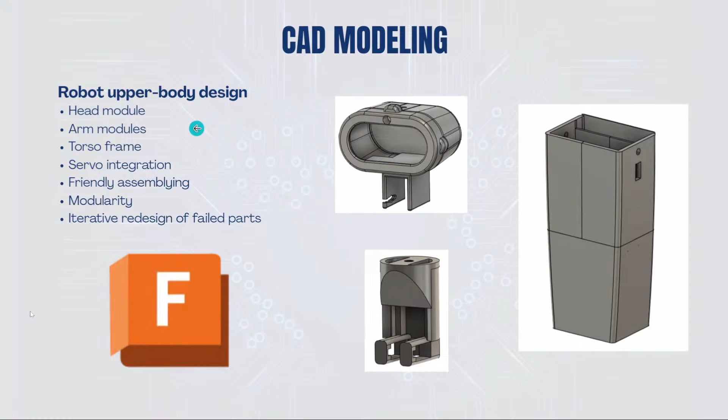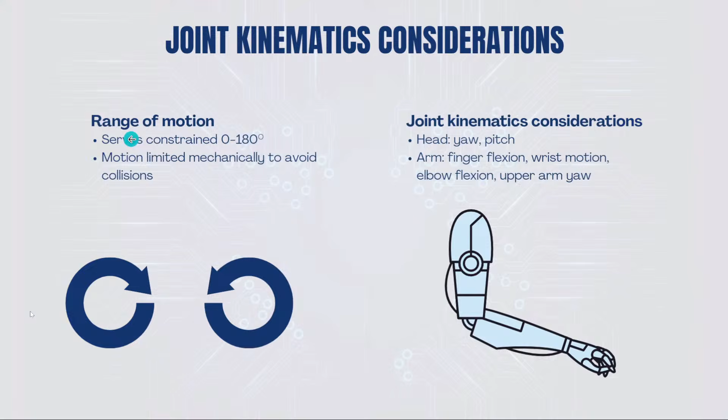Here we have the joint kinematics considerations, and the range of motion of each servo was limited mechanically to avoid collisions, and also some joint kinematics considerations, which are the movements of the head and the arm. And here we have a video of how the printing process works. In this case, it is the printing of one hand of the robot.

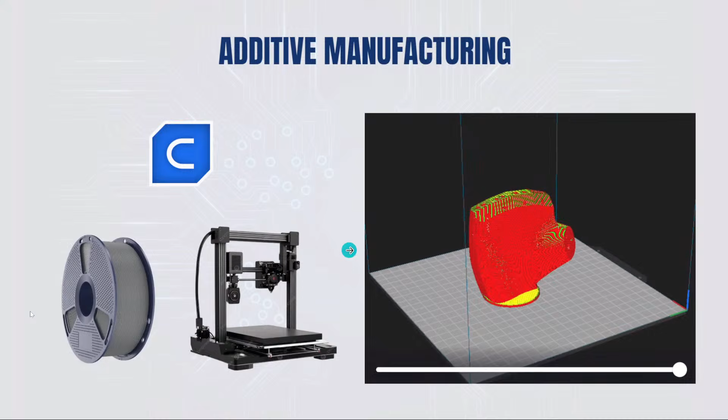Okay, and then we continue with the technical specifications. First, we have the actuation system. This system consists of the servo motors. Here we have a smaller one. This was planned to work for the fingers. So this needs to be lightweight and also compact, so it can be easily mounted in the robot. And its purpose is the finger flexion and extension.

Now for the wrist, we have a higher torque servo, which is an MG996. For this joint, we need more torque. So this also means that this servo is bigger.

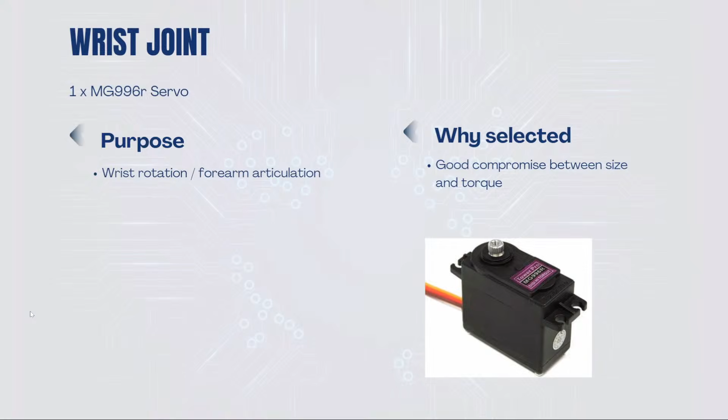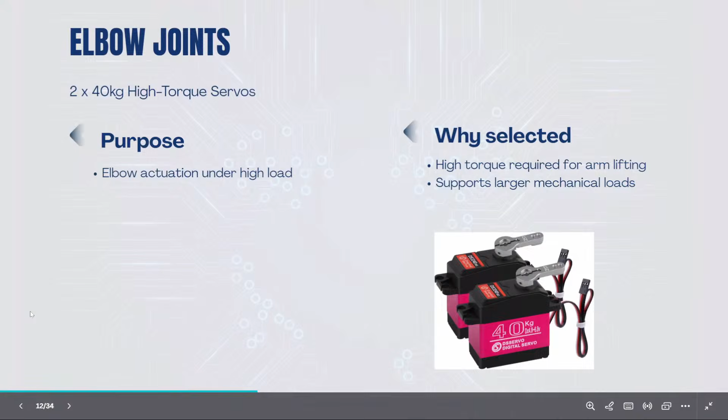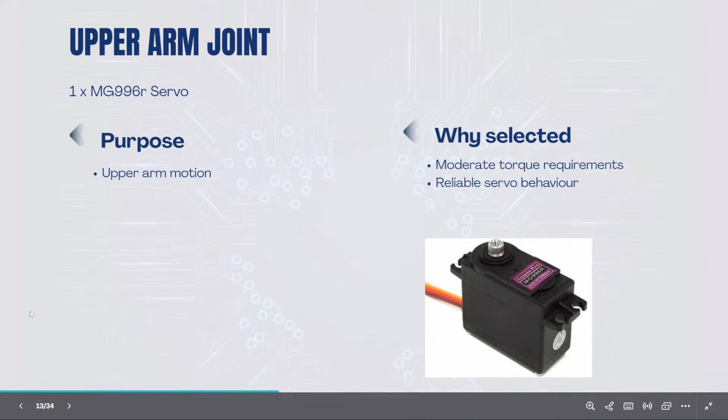And then for the elbow joints, I also use high torque servos, but in this case it's 40 kilograms because it needs to support larger mechanical loads. Then for the upper arm joint, we also have a MG996 servo because it doesn't need that much torque. So that's why I use this.

And for the head mechanism, which is composed of 2 degrees of freedom, we have these two servos for the movements from right to left and up and down.

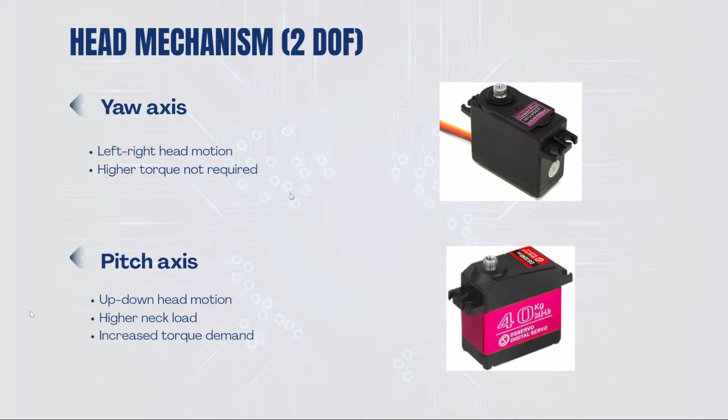Okay, now we have the power system. And in this case, I use a LiPo 2S battery because this can deliver a high peak current, and it also brings a suitable voltage for mixed servo types. And it's also stable under multi-servo load.

Okay, then let's continue with electronics and control. For the electronic components, the most important ones are the power distribution bus and the voltage regulator, because the servos will be working at a different voltage than the one supplied by the LiPo 2S battery. So I need to regulate the voltage. And of course, we have the microcontrollers.

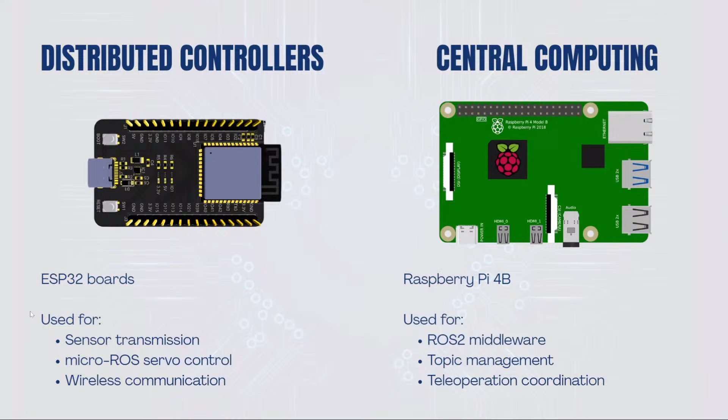In this case, I use ESP32 boards, which were used for the sensor transmission, micro-ROS servo control, and wireless communication. And the central computing, which is a Raspberry Pi, used for ROS2 middleware, topic management, and teleoperation coordination.

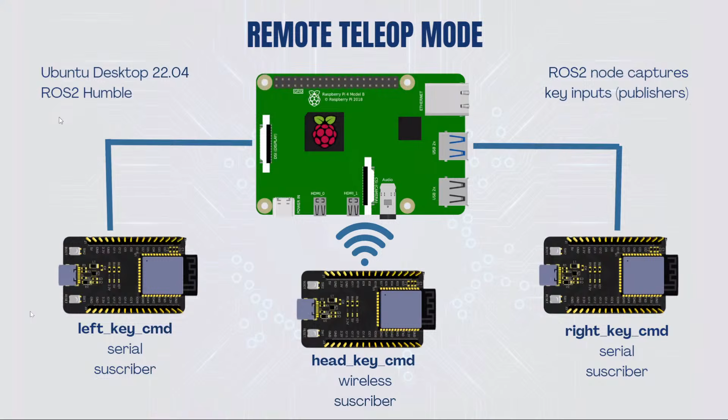Okay, we have some considerations for the remote teleoperation mode. It is very important to use Docker in this project because for registering my robot to The Construct platform, I use Docker. And in that way, I can use the ROSject to control the robot with SSH. So in that case, I can enter the terminals and run all the programs to start working.

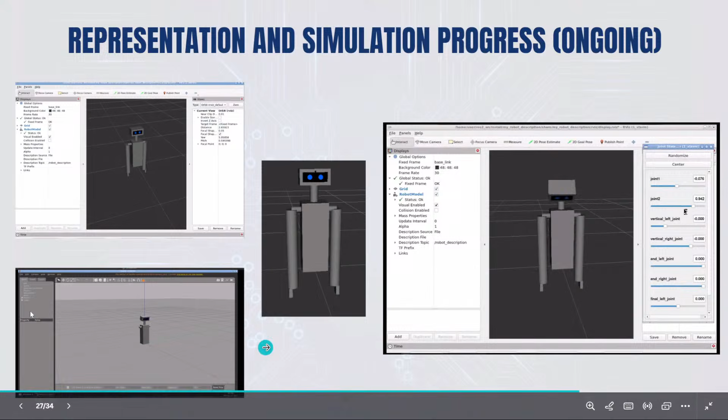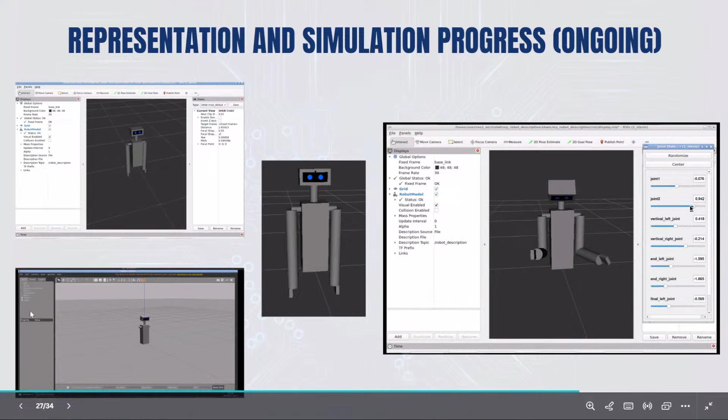And this is a representation and simulation of the robot. This is ongoing because I faced several challenges. For example, here we can see RViz, and I can move the joints in RViz with different values. And Gazebo is in the window below, because it is not finished. Because sometimes when I try to make the simulation work, the arms have some problems and don't appear in the Gazebo simulation. So that's why this is ongoing.

And then we continue with the object detection system using YOLO. And as I mentioned before, this system will generate some images with bounding boxes and labels. So the robot can identify different objects in real time. For example, it can detect a person, a chair, a plant, many objects.

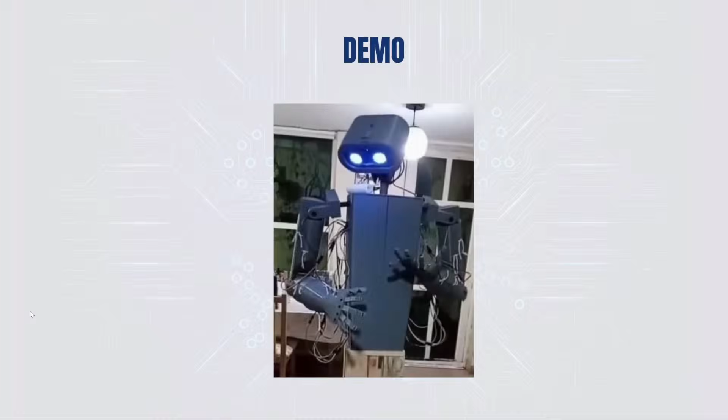And also we have a web interface. This uses HTML, JavaScript, and roslib. And the communication between the web page and ROS 2 is achieved through rosbridge, which provides a WebSocket. So this allows the connection between the browser and the ROS 2 ecosystem. And here we have another video of the robot working, moving the arms and the head.

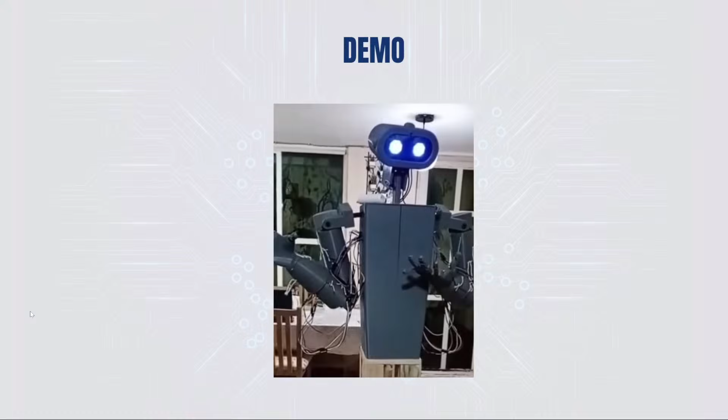Okay, so the results of this project. We have a web page visualization, real-time control with a keyboard, ROS 2-ESP32 communication with micro-ROS, wireless communication, object recognition using YOLO, 3D design and printing, and smooth actuation of head and upper limbs.

And for future work, I'm planning to do vision-based autonomous manipulation, predefined gestures, stronger materials for the robot, like nylon, and the full dynamic simulation with Gazebo and RViz completed, working completely. So to achieve this, it's also important to use servo motors with encoders.

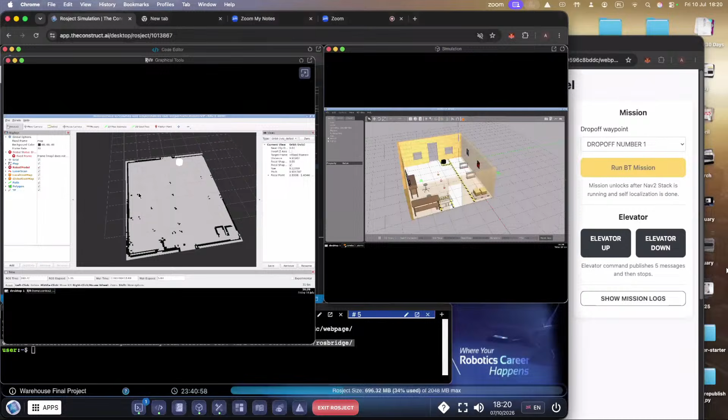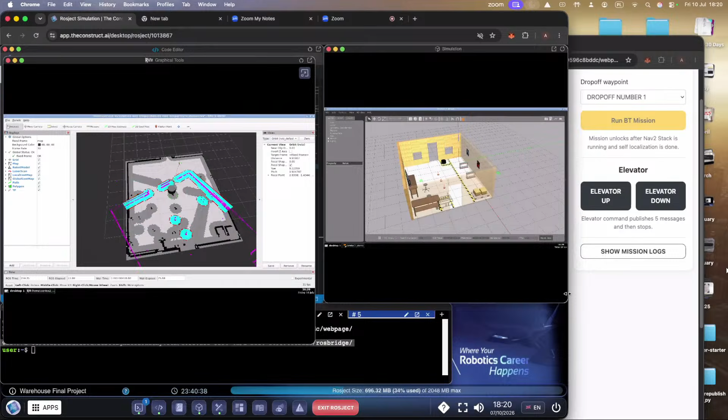So we start the nav2 stack, and in a few seconds we should see the robot in RViz. The robot doesn't know where it is right now, so let's make it harder. We start the self-localization, which resets every parameter and makes the robot rotate and look around to see where it is. That worked, because the robot is indeed in this place.

Let's see if our joystick works. Each side of the interface has its own logs, but we can hide all of them for now. Yeah, as we can see, the robot is moving. The joystick is working, right?

And now the screen is way too small. So now we can start our mission. Here we have some basic information about where the robot is, what's the angular and linear speed, basic stuff.

So I will ask our audience, and Alberto, you can tell me where the robot should go. Should it go drop off the shelf at drop off number 1 or number 2? Okay, so whoever wants, you can decide. Whoever wants 1, type 1 in the chat. Whoever wants 2, type 2, and the one with more votes will go for that one. We'll make this entertaining.

I'm going to vote for example, 1. There is a little bit of delay between us talking and YouTube live, so maybe it's going to take some seconds for them to respond. Or we can just say it's 1. Okay, we are starting to receive votes now. For now it's winning number 1. So let's go for 1.

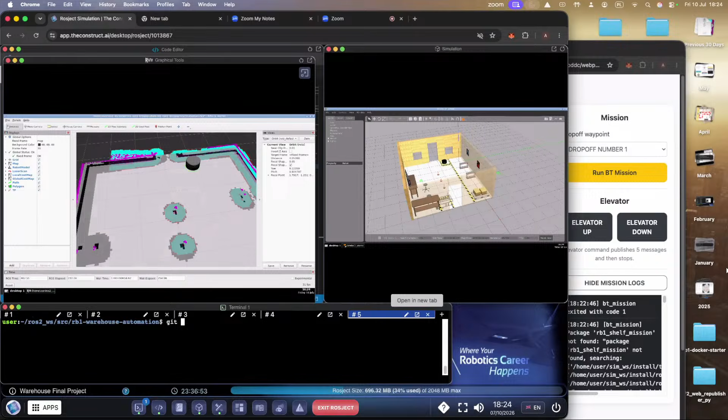So okay, let's do it one more time. Sorry for this. What I did was I checked the simulation, and then, because I wanted a clean source, I deleted everything and recompiled, and this time I couldn't recompile all the way to the end.

So it's always interesting to see all these things live. But basically, this is what we do. This is programming live.

And the good thing is being able to detect it quickly. So this is what's happening. We need to compile it again, but now with the bigger computer it should be pretty fast.

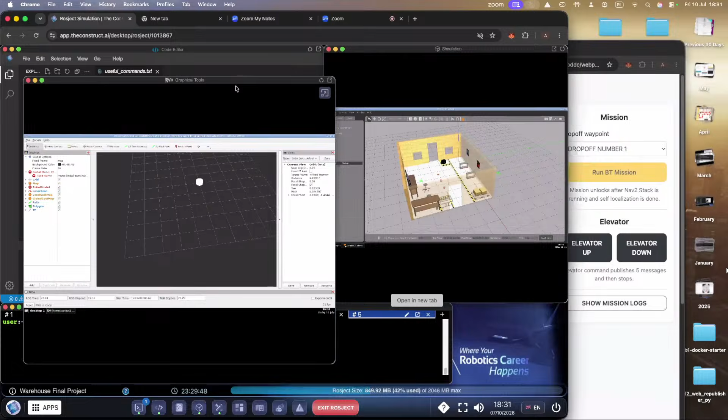Did we do it? Okay, the simulation works, it's not frozen.

Okay, yeah, this looks correct so far. We were not seeing the map earlier, so maybe that was it. I would try again. Just try again. Okay, there, now we go, it's working.

Okay, and now a bit of trivia. The reason why the robot spins only 180 degrees, and I demonstrate that the joystick is indeed working, is because in simulation this warehouse doesn't have a lot of distinction points, and sometimes, very rarely, the robot thinks it's across from this point, and when it moves around, it understands it's not actually there, but I didn't want to waste your time with it.

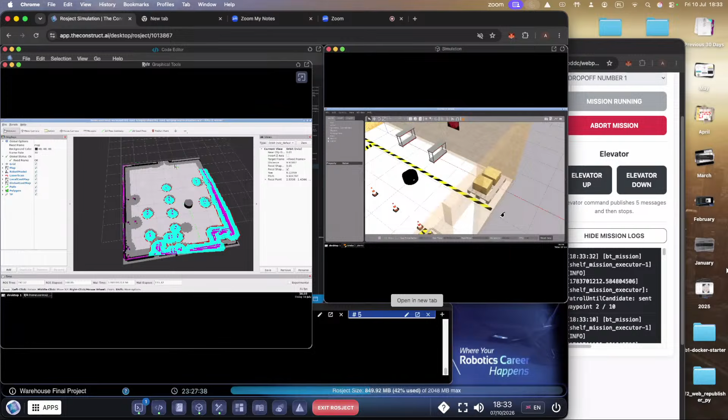So yeah, let's do it again and see if now it will work, because exit on finish is my parameter, and we trigger the mission. So the robot is going, he's patrolling, so he's going to the first waypoint, which is somewhere in the middle. I can move around in the simulation, but sometimes it can freeze, so I will try to do it so we see everything and don't make it freeze.

So custom drive on heading, he's computing the pre-dock pose. Right now he doesn't see the... this is actually good that it happened, because NAV2, as you can see, the front of the robot is not exactly facing the shelf, so it cannot confirm that this is actually a shelf. So he will come back to patrolling again, and that's actually good because you can see how this behavior works, what the recovery behaviors are, etc.

So now we are computing the pre-dock pose. In simulation, sometimes it takes some time. Okay, yeah, adjust to pose local. So now the robot will go very slowly for the final pre-dock pose, and now we start docking. During the docking, the robot is correcting its position, now this is custom docking.

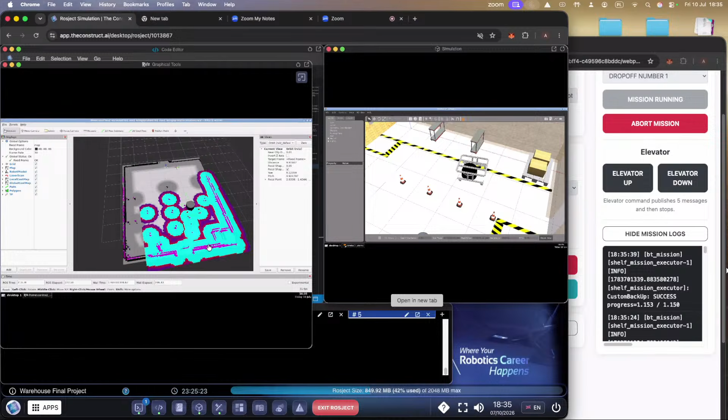As you can see, the robot is doing like an arc, because there's a wall on the left side of the robot, and you can see on the RViz map that the inflation radius around the obstacles is much bigger, because now we carry the shelf. We can confirm that the first drop off is in the middle of the first and second shelf.

So the robot is putting the shelf. And what's funny in this simulation, I will not run this simulation again, but if you run this simulation and the first thing you do is manually send the elevator up, the shelf will magically appear on the robot immediately. There's a funny bug.

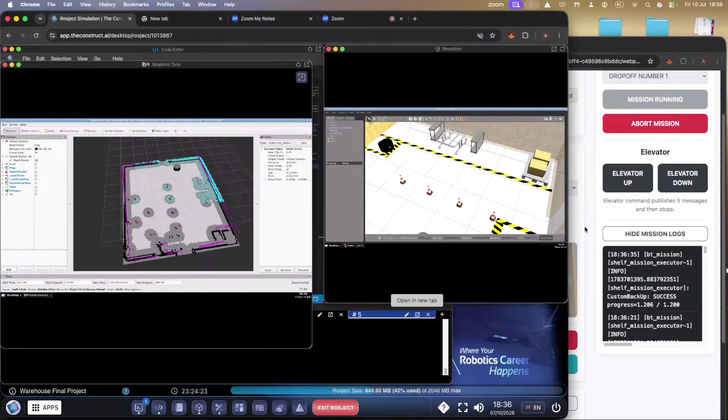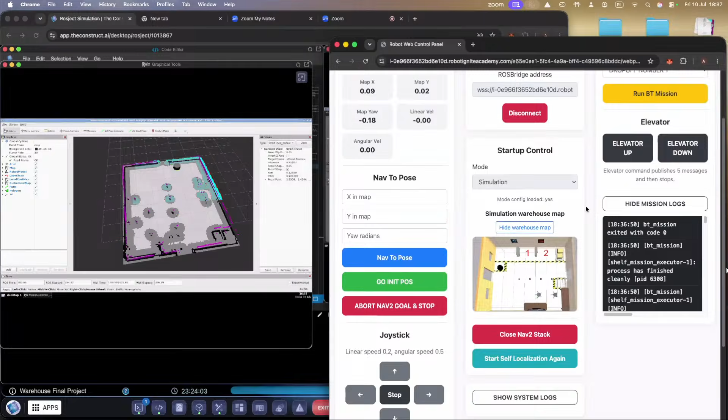And now the robot is coming back to the initial position, backing up, not going in forward, unfortunately. So yeah, as you can see, those reflective parts of the shelf are now from the other side. We cannot do the number 2 drop off right now in the simulation because the robot wouldn't find the shelf, because the moment we take the shelf up, it somehow changes the orientation.

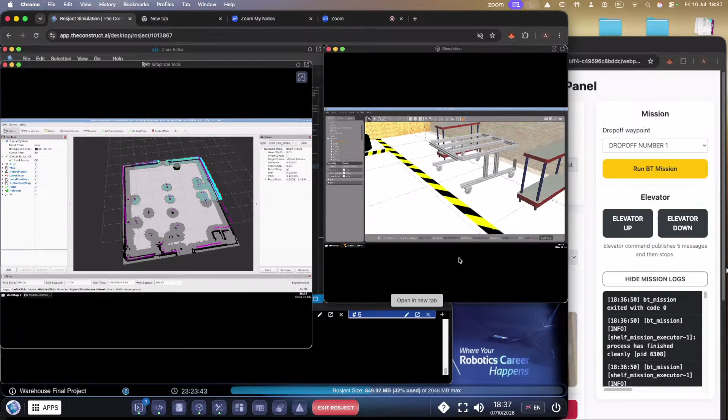So what about going to the real robot part? Let's go for it. Yeah, sure, let's go for it. Connect to my favorite robot. Book your slot. No. Oh yeah, connect.

Okay. Both cameras are working, which is very nice, because I will tell it right now, so I excuse myself in case something breaks. Sometimes when there were some network issues, this code didn't work because there was high latency, and the TF messages were not in sync. But now I see the cameras are working. The quality is good. I can see the latency. Ooh, it's 250. Okay. Let's see.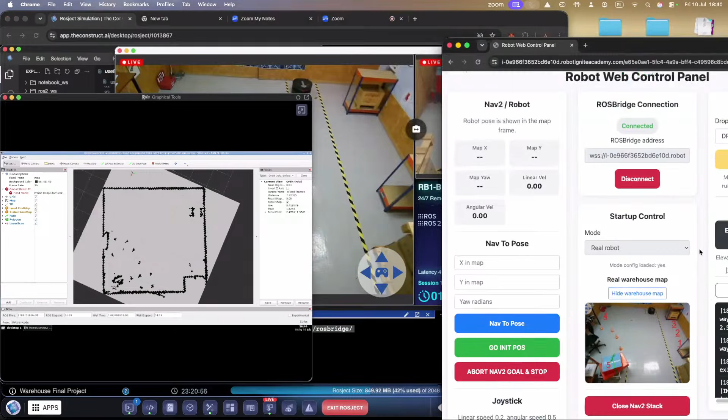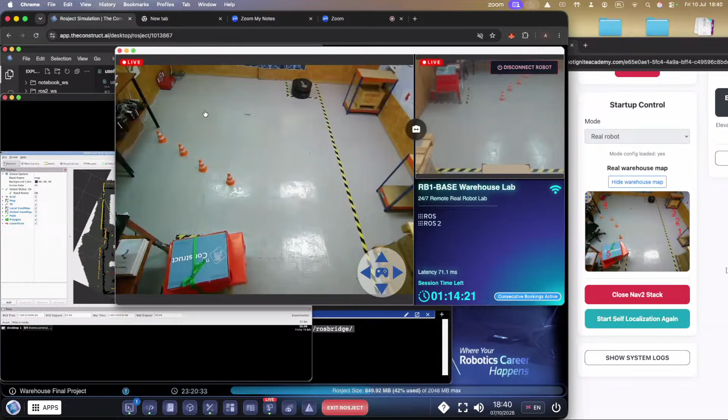Now we will start self-localization. Yeah, okay, it works. Great. At least that. So with the real warehouse, no problem. We can do a whole 360. There's a lot of distinct points. So yeah, let's do it again.

Let's ask our audience where we want to go. I will try to make it bigger. Okay, yeah, that's the absolute maximum. So the numbers 1, 2, 3, 4, and 5. Actually, 4 is next to the charger. 5 is where the shelf is by default, and 1, 2, 3, I'm just not very creative.

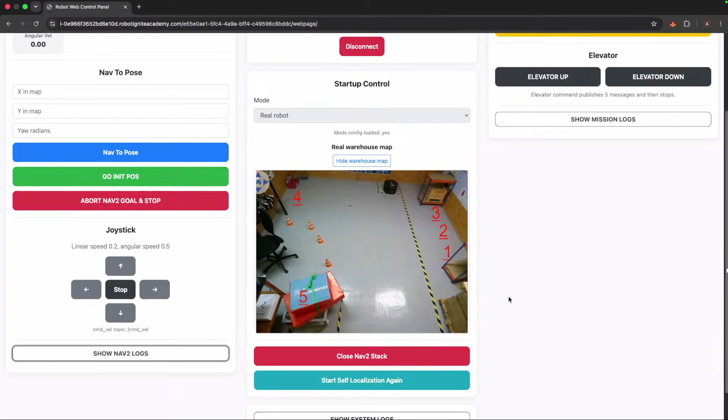Okay, so let me say 4, for example, myself. I'm going to vote 4. Let's see if we can get some votes here. Which one wins?

The shelf is properly placed? No, because it shouldn't be orange, right? Okay, so we should have the white ones? Yeah, but I can do it. Let me ask, I think Roberto is around here. Turn it around. It depends, because it's Friday, I know you guys want to have a weekend. I can do it and showcase that my joystick and everything is working. But if you can ask, it's going to be faster. Okay, yeah. This is what I thought.

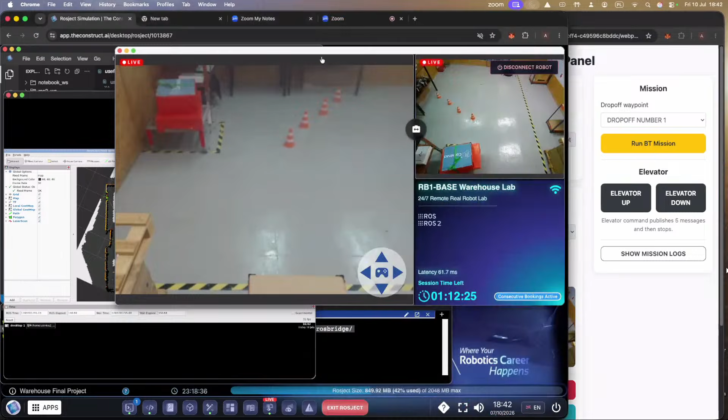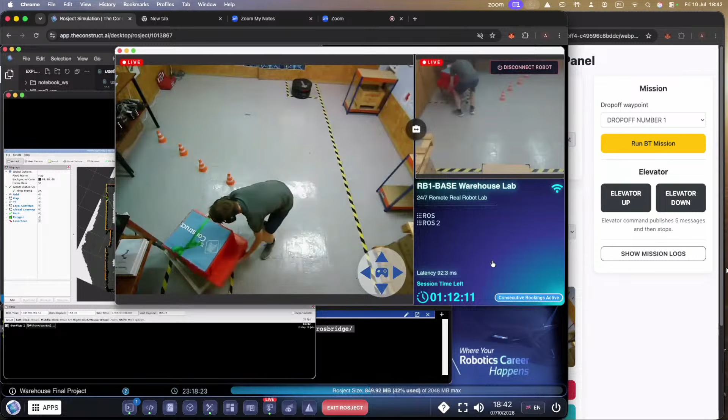Sure thing. So I think we have recently installed these new panels here also, so we have reflective panels on both sides of the shelf. On the shelf, right? Yes, on the shelf. So it's reflective, but is the intensity different or the same? It might be different. So that's why I prefer to do it with the classical ones that you've probably used for all your tests.

Yeah, I thought those oranges are just an indication that the shelf is oriented the wrong way. So we know, oh no, it's orange, we should turn it. I think they also provide intensity values, but yeah, it's better just to try like this. Alberto, do you know which? So yeah, I would say let's go with 4, because this is my favorite waypoint.

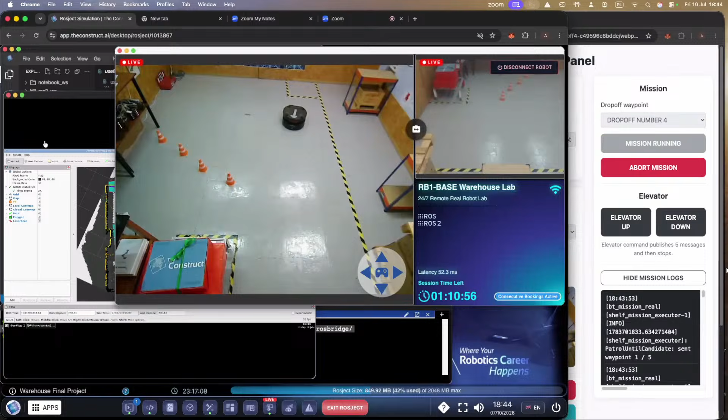Okay. So we trigger the mission. And here we have only 5 waypoints in those critical places. So the robot is moving, and now let's hope for the best. Compute pre-dock. Now we did refine the shelf geometry. We adjust the pose locally. We go under the shelf.

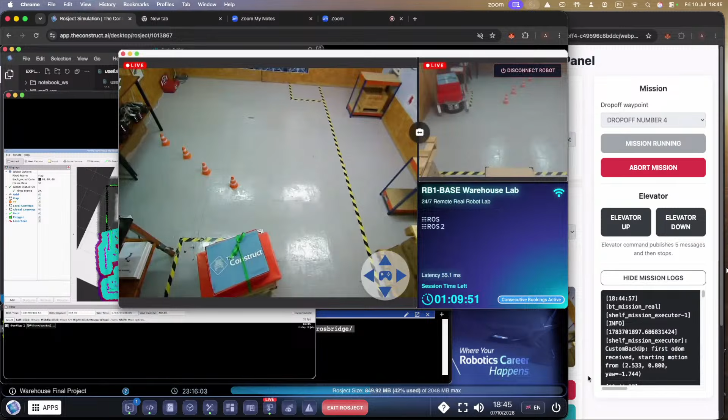Yeah, it can be seen that it's elevating. And it's moving. Like previously, he detected the wall on the left side, so he's doing the arc. Oh, this is brave. This is very brave from him that he goes. I thought he would go.

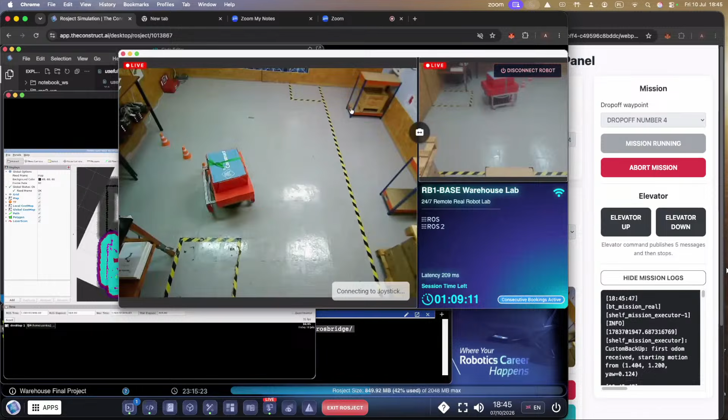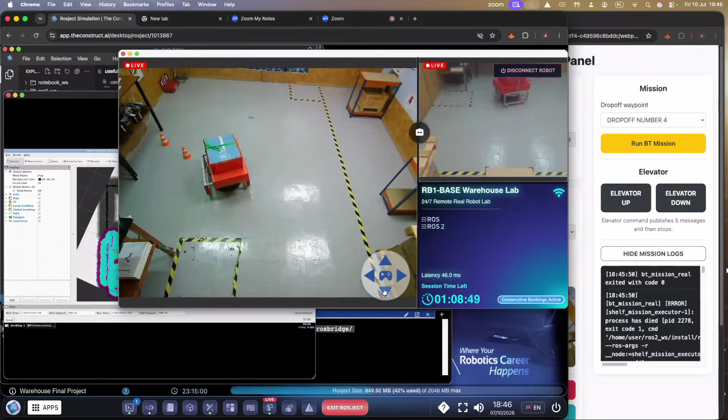Robot, why are you doing this? I think it's eating some of those cones. Yeah, he's eating the cones basically. I don't know why he thought that's enough space for him to go, not to use the back movement. So I will. Jesus.

You are celebrating it now, right? Yeah, like what? Yeah, now I'm... why? Why? Okay, I don't really understand this. Yeah, so now what we are seeing is the front of the robot from here. So, okay, I can see the red. Yeah, okay.

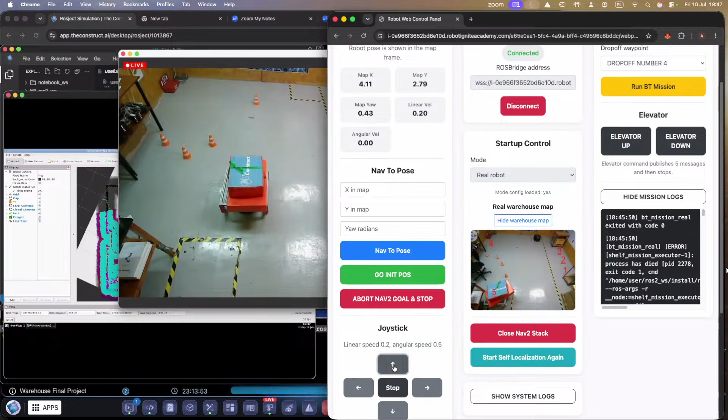Let's try again. Can you ask Roberto to put the cones in place? Because I don't want this task to be easier with the cones somewhere. Yeah, there we have it. This should be good. But now I can showcase that the buttons are working.

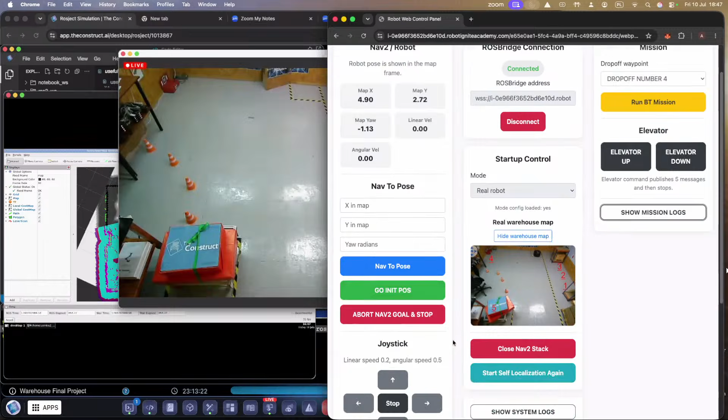So elevator down. Maybe we can even try to start the mission not from the initial position, but from the middle, between the starting point and its current point, so we don't have to go all the way back. Yeah, because the first waypoint should be somewhere here. So we run the mission.

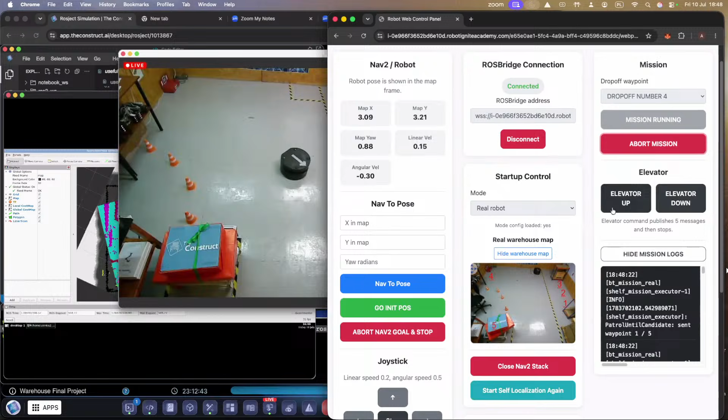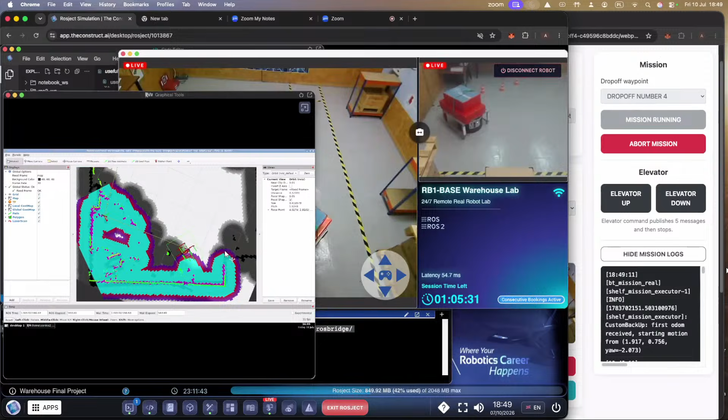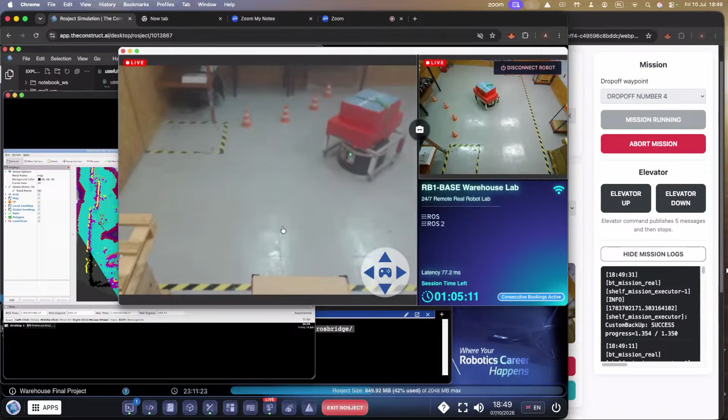So basically, what failed was I had misconfigured Nav2 somehow, going from waypoint to waypoint with the shelf. The problem is right now we have the old footprint. Okay, I'm very proud of this robot because he smashed the shelf a bit, but with the wrong footprint. As we can see, it's very badly positioned. So we should restart the whole system, because this is something I didn't do, since it was very difficult and not much to do with the robotics itself.

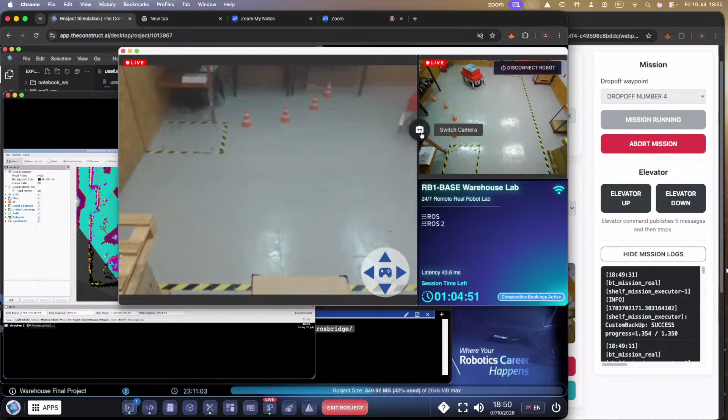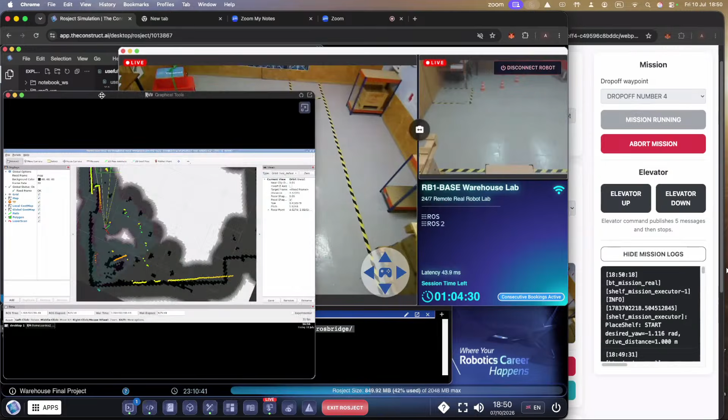I tried to create the change footprint button because during testing I had some problems with this, and I wanted a quick way to change the carry mode from carrying the shelf to carrying nothing. But I would need to hard code basically everything into the backend, and I really didn't want to do it. What I will do is stop the mission when he leaves, because he will probably smash it. Fine, okay.

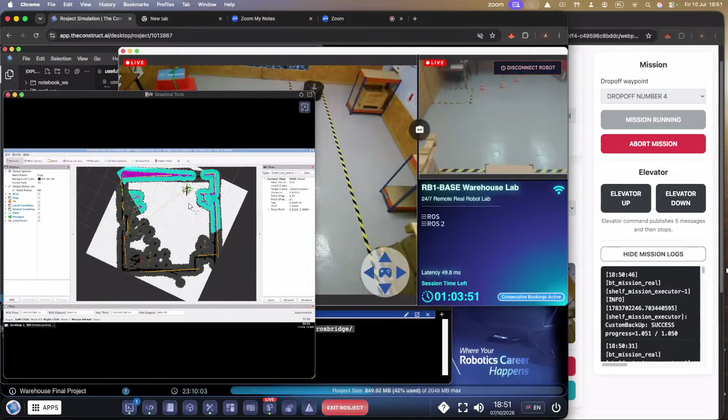So it's okay-ish. We can choose another drop off, and now it's even better because the shelf is not in a very straight position, so it will be more difficult for the robot to do it again. And now he'll change the footprint after leaving the shelf, so we can do it again. Alberto, you can choose the waypoint now, so we go faster. Is it going to be able to pick it up from there? It should. Let's go for 2.

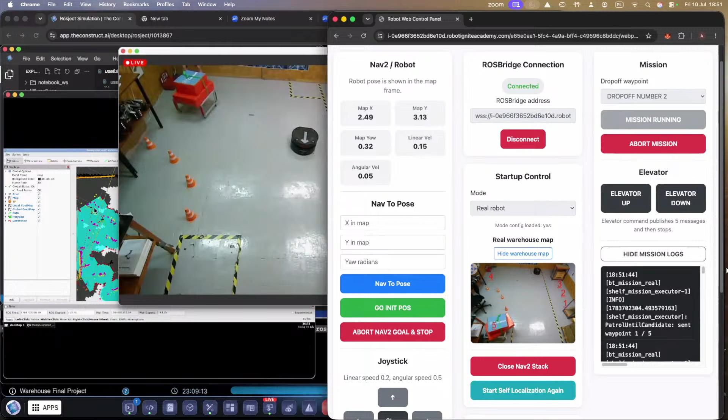And we trigger the mission. Roberto is appearing there. You don't have to do anything, Roberto. He makes it even more difficult. He's trying to put it there. Okay, very helpful, Roberto, indeed. We compute the pre-dock pose.

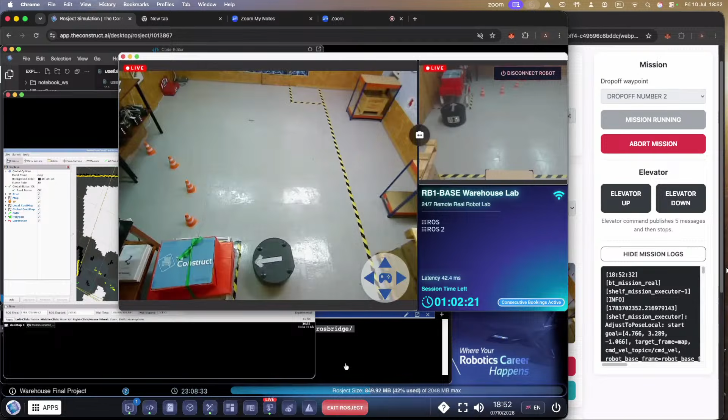So what would have happened if Roberto didn't move it? I suppose it would have continued patrolling a bit more, right? Yeah, he'd go near the charger and then to the initial point. But what would happen if Roberto took the shelf with him? The robot would do two circles, go back to its initial position, and finish the mission with success, because he just didn't find the shelf, but there were no errors, nothing interrupted the process prematurely.

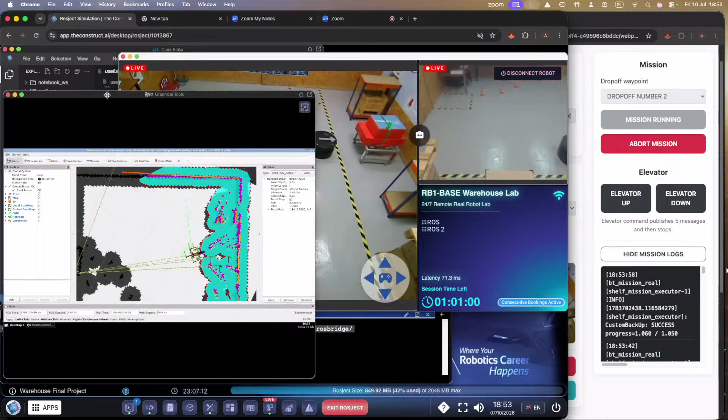Okay, now no cones ahead of us, so this one is it. That's why I like number 4 the most, because the robot needs to carry the shelf the longest distance. And the robot changed the footprint. I wanted to do it like this, so we see all of this.

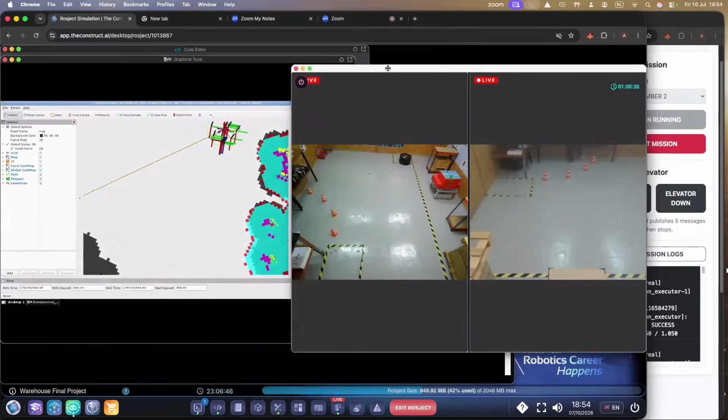Okay, Alan, so I think we can leave the real robot demo here. I think we've been able to see it do many different things. Yeah, actually, I'm really proud of the robot that it smashed 2 cones, but still was able to drop off the shelf and back without carrying it through the whole warehouse. Because this had happened during the creating of this project. So yeah.

Yeah, so it's been very interesting seeing all these different actions, tests, both in simulation and real robot. And I must say that something that's very good from your project is that you can switch seamlessly between the real robot and simulation mode. That's very convenient, right? Just by changing the button. So that is super cool and super good design for your application. So very well done there. And it has allowed us to switch between the simulation mode and the real robot very easily and do different tests and so on. So yeah, well done, Alan.

Yeah, actually creating this interface, it was not only required by this final project, but you have no idea how much it helped me during debugging, because right now I had only 1 button to start all the nav2 stack and everything, or to lift the shelf manually with those buttons. Normally I would have to copy this topic calling or whatever. So yeah, this was very helpful even in this stage of still developing this thing.